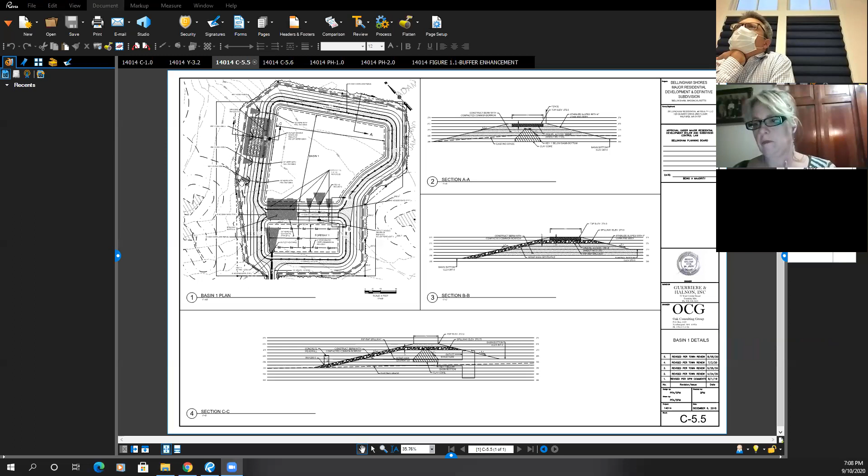Additionally, we've redesigned the outlets to the basin, so rather than one or two centralized outlets, we've dispersed the outlet flow over 4 separate outlet pipes. So it'll come out of the basin at a lower velocity and disperse more evenly into the wooded area beyond it. Also, these outlets are all outside of the buffer zone.

We have also added a clay core to the center of the berm. The purpose of this would be to eliminate potential seepage of water stored in the basin, seeping through the embankment and potentially compromising that embankment. So this would help with the long-term longevity of the basin.

We did receive a comment letter from BSC, and I believe Frank's in here, so I won't really get into that too much, but there was a comment or two with suggested conditions regarding this core, being looked at by a geotechnical engineer and spec'd by a geotechnical engineer prior to construction. And of course, we have no objection to that condition.

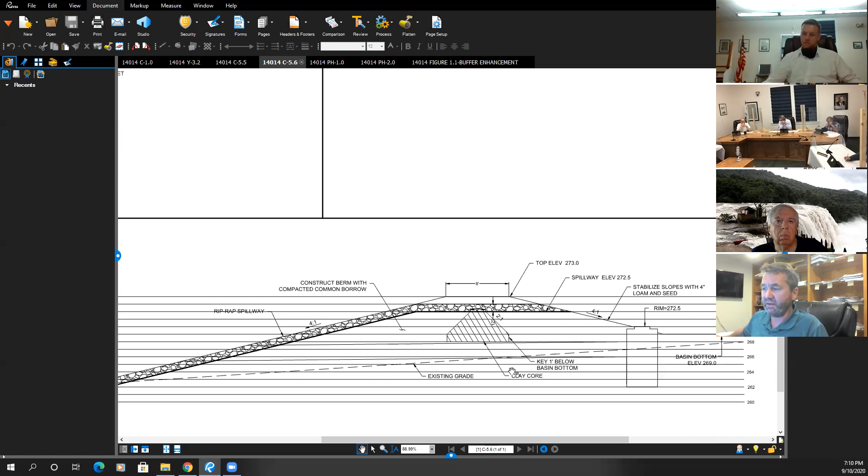Basin 2, again, we've added the clay core to the center of the berm. And I think one of the suggestions that Frank had would be to bring this core all the way to the existing grade so that you still don't have fill under here. So that would be part of that design to be submitted prior to construction.

Other than that, we're still, in each of these watersheds, reducing the rate and volume of runoff from the site. So there should be no drainage issues from the site. If you like, I can stop there, Mr. Chairman, or continue with some of the other changes that we've made.

I'd like to get Jim's input first on stormwater and then Frank's. I think this may be one of the most critical discussion points of the development, based on what you proposed in regards to the 100-foot buffer. So Jim, what is your feeling?

Yeah, so I think Sean has definitely taken a significant step to improve the basin, pulling in and reshaping that basin to get out of as much fill area as possible, as well as getting out of the jurisdictional wetland areas as possible. And then this clay core, which I'm interested in Frank's opinion on, seems to be a significant improvement. My concern always has been longevity of this basin, due to the fact that it's an extremely important structure to maintain water from getting down gradient to homes and the lake. So this is a critical structure, as you mentioned. I think Sean has definitely taken a positive approach, and I'm definitely interested in Frank's opinion as well.

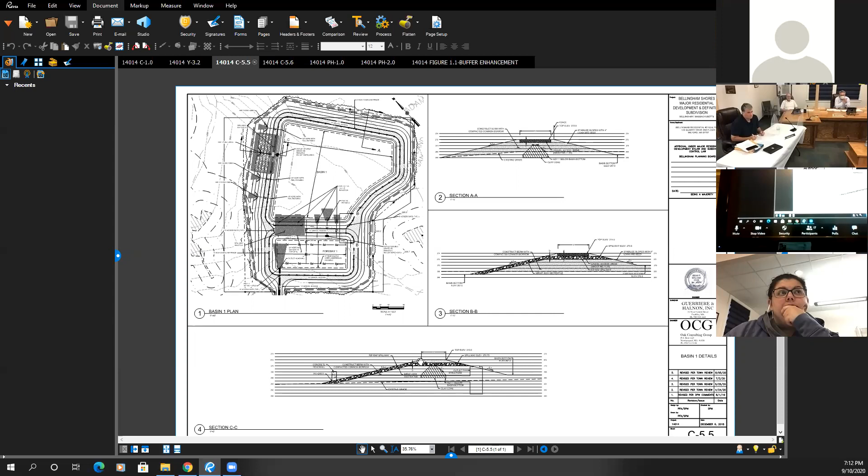Frank, what are your issues, if you have any? Sure, so again, I want to start—the previous peer review comments that we had have been addressed, and I think they've addressed them satisfactorily. In the latest set of plans, I would agree with Jim that the shift of infiltration Basin 1 out of the buffer zone maintained pretty much exactly the same hydraulic capacities and hydrology. The outflow and stuff have not been modified from what was done before, just minor adjustments. I think the modifications, the way they set up the outlet flows, are fine.

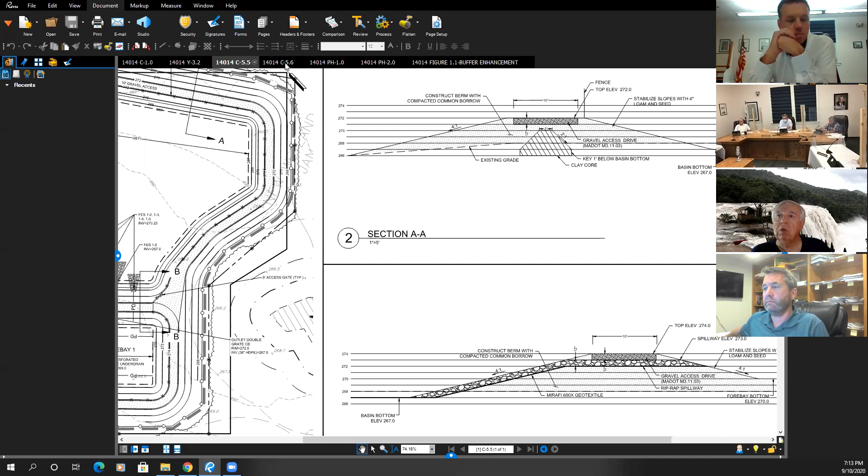My comment regarding the clay core, which I think is a very positive thing, is that it basically will stop infiltration or seepage through the wall of the berm. My concern was that it didn't go down far enough. If you look at section AA on Sean's plan, you can see the bottom of the clay core is above the existing grade.

If you go down to section C on the same plan, the concern I had there is twofold. One, the clay barrier doesn't go all the way down to the existing grade, so there may be potential for seepage along that interface. The second part is tied to the outlet pipes. When you install a drain pipe, you generally embed it in a permeable material like gravel or crushed stone, and that can act as an avenue as well. So my suggestion would be that the clay barrier extend around any drainage pipes coming out of either infiltration basin, and then extend below the existing grade.

I've seen some designs where they add a key-in at the bottom, like another inverted rectangular shape that goes into the soil below. What that does is prevent a straight surface for the water to go underneath the clay barrier — there's another small barrier, maybe a foot or two below the bottom of the main barrier. My recommendation would be that this be looked at and designed by a geotechnical person with the expertise and understanding, and that it be included in anything done prior to construction.

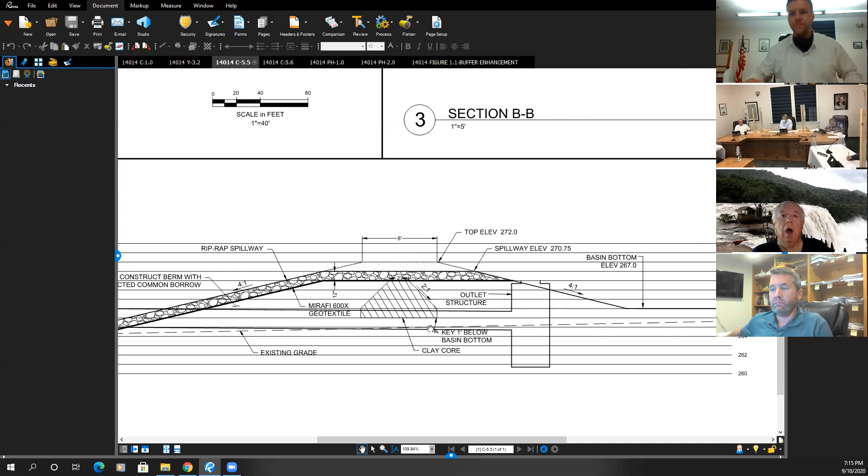Those are really my concerns about the two infiltration basins. One minor point on basin 2 — there's a scrivener's error. The outlet structure should be at elevation 270, I believe, but on one of the cross sections it shows 272.5, which happens to be the same elevation as the spillway. In design, you want the spillway slightly higher than your outlet. That's a very easily addressable issue — I think it's just a scrivener's error.

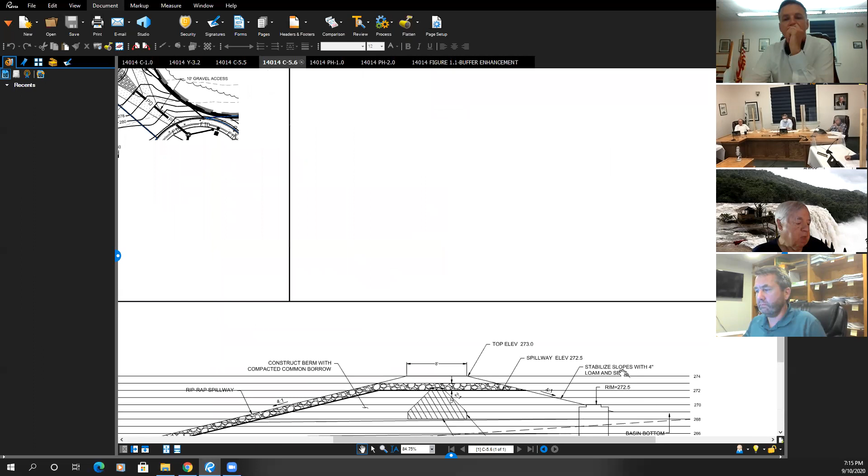The last item I wanted to note was that the Conservation Commission asked Sean and his folks to look at a groundwater mounding analysis underneath both infiltration basins. The concern is that with water sitting in the basin, you could raise the groundwater around the area. There's a standard methodology, the Hantush equation, used throughout the industry for mounding evaluations. Sean's team did that evaluation for each basin over a 36-hour period, and it shows the mounding underneath the basin pretty much extends just to the edges of the berm, not beyond 120 to 140 feet from the center of each basin. That mound is basically at existing pre-development groundwater conditions, so there's not a major raising of groundwater around the basins.

That's pretty much it for my comments. I'd be happy to answer any questions you might have.

Frank, I have one question before I open it up to the board: at the end of this discussion, will you be able to give Jim and Sean some points by next week that need to be addressed based on your concerns? Sure, I could certainly do that. I did file a letter this week, I think it was only yesterday, so it just got in the door, but I'd be happy to provide any clarification or additional points.

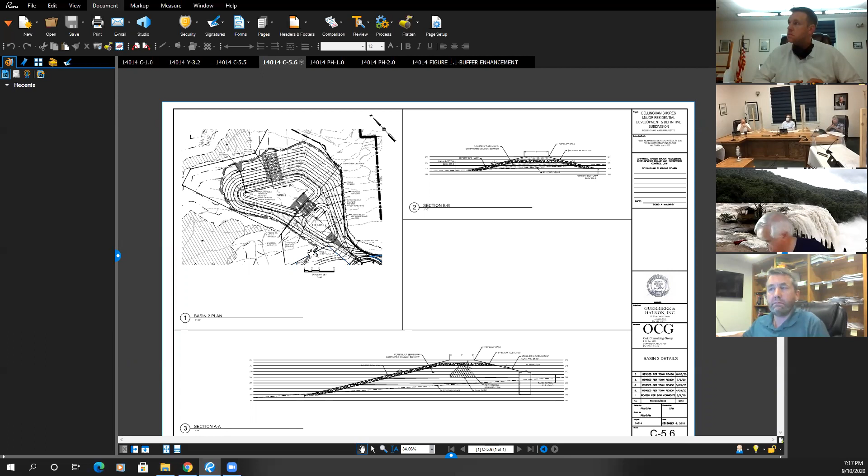Brian? I just have one quick question, Frank or Sean, or both of you. For some other projects in town, we've been experiencing rainfalls that exceed the standard amount of rain, with the frequency of those 100-year storms and a lot more volume coming from those storms, and they're coming more frequently. I'm curious if this basin is designed to conservatively weather those increased capacity storms, and what additional capacity is in this system.

I would say yes to your question. We designed these for a 100-year storm. I'm not sure if we've had storms that have exceeded that, but certainly there have been some intense storms. But I would note even for our 100-year storm event, we still have the reduction in both the rate and

the volume, so I don't anticipate any issues with storm events in the future here. If I could add a little bit to that, and correct me if I'm off on this, Sean. So under the Wetland Protection Act, they go back and use rainfall data from the 1970s or before, technical paper 40. I think your bylaw, and I'm pretty sure Sean used this. I can't remember if it was the Cornell or the other one. There was an updated version in the late 90s and another one in the mid 2000s.

I don't remember the specifics here, but for example, the 100-year storm might have been from the 1970s, 7.5 or 7.4 inches of rainfall in 24 hours. I think the Cornell is around 8.2 or 8.3 inches. And again, I'm doing this from memory. So by using the later data, you're using a higher volume of rainfall than what is required under the State Wetlands Protection Act, so there is something built in there.

Is it continuing to change? Yes, but again, I think there's some freeboard in here, and quite honestly, the drainage system conveying it doesn't handle a 100-year storm, it handles a 25-year storm. So for the near future, depending how slow or fast climate change continues to accelerate, I think the basin has been designed in a conservative manner for both basins.

I'm Brian Blake. I'm in agreement, but I don't want to get out of turn. I'll have a question for Jim in a moment.

Dennis? Yeah, my only question was how deep the clay core is going to be. And I think Frank pretty much summed that up, and I'll probably wait till Geotech comes back with his findings, because that's going to be out for the leaching purpose of it, and I didn't know if they want to line the sides of that with clay. I think that may be one of the recommendations that Frank was talking about.

Okay, perfect, thank you. Liz, I have no questions at this time.

Phil: The longevity of the clay core, is there a difference between the clay core method and a more typical method? I guess I'd throw that out to Mr. Malone. Yes, so a lot of times you'll construct a basin with just the material that's on the site.

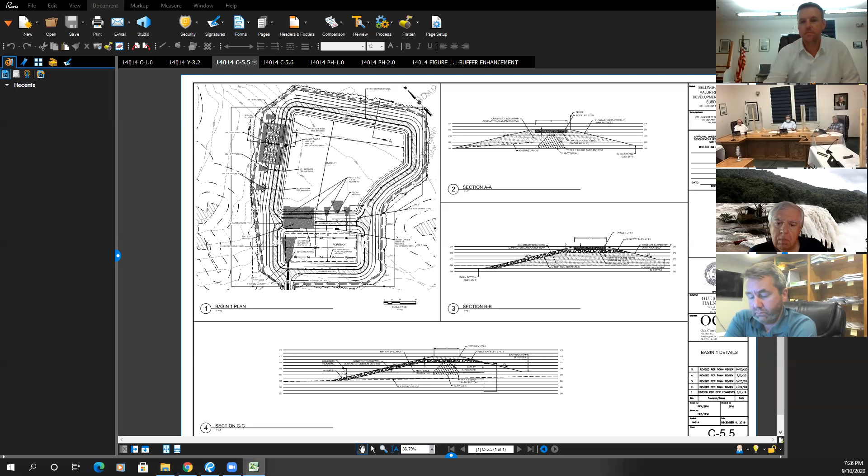Frank, I'd like to take it one step further. I would like to have that person not only look at how it's constructed, but also be available to be on site as needed during construction. We have one shot at this. And I know people had mentioned the 100-year storm. I think, Jim, since you've been on the board, how many 100-year storms have we had? Yeah, we've had a lot of storms that have breached old basins, certainly, throughout the town, various locations, we've had some concerns. So as I said earlier, we have one shot to get this right. So I think the specialist who looks at it may be on call to monitor construction. I assume they do that.

Yes, my understanding is, I've been involved with people who do that, yes, from geotechnical. And I know a question was raised earlier, I didn't mean to cut that person off.

I'm very concerned about maintenance and who's going to be responsible for it. I know in some developments, speaking from experience, there are retention ponds that have not been touched in 20 or 30 years. Jim, is there any way we can get an account set up that taxes could fund over time for maintenance? Or is that the responsibility of the town? Yeah, that's actually a standard condition the board has done for subdivisions, the stormwater annuity that would be set up, and it basically goes into, it's a one-time payment. We can work out what that maintenance cost would look like. We have a pretty standard formula at this point, and it would go into the DPW account for maintenance.

But as you guys point out, the maintenance schedule might need to be refined a little bit, so I can certainly work with Sean and the DPW director on what that would look like. I apologize, I did not get the name of the gentleman who raised the issue about maintenance, but sir, I think that hopefully will address your concern. I think that was you, Bill. Oh yes, yes it does. Thank you. Okay, any other questions regarding the maintenance, sir? We will button that up.

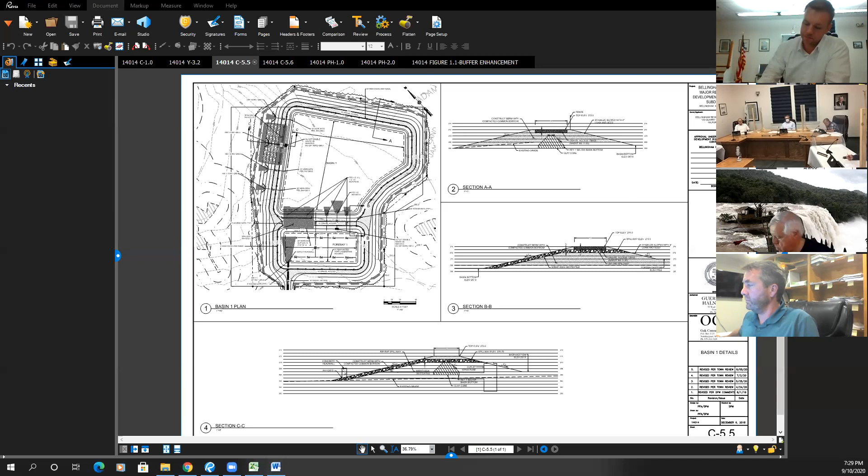Thank you. Jim, what I'd like to see done is something that Frank had raised. I'd like to see if we can use the new Cornell numbers. Yep, yeah, and for this one, given that we're permitting side by side with conservation, we do use the updated numbers because it's codified in their local regulations. Okay, so Sean, I think you may have a little bit of homework in that regard. Any other questions or concerns from anyone on the board or the audience on the stormwater management?

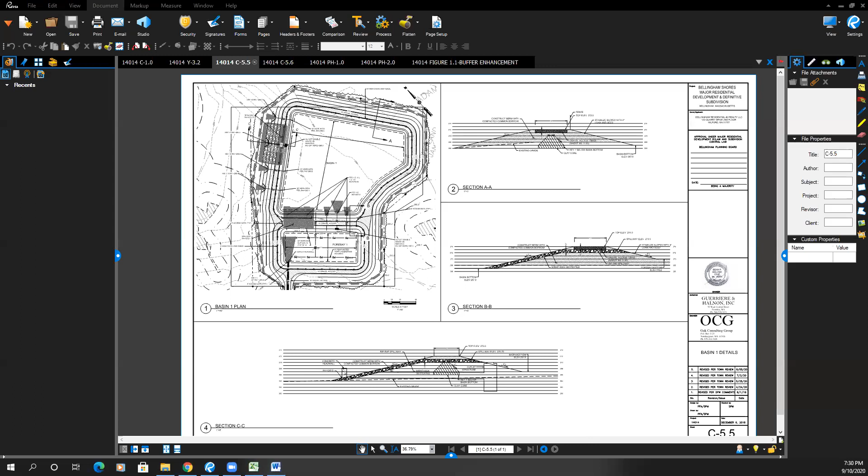Jim, can you bring the screen back? Sean, can you release the screen? Yes. Okay.

Now I think we also want to talk about, Sean, you want to mention what you've done with the 100-foot buffer? And I want to thank you for doing that. Yes, and if you like I could put the plan back. That's fine, okay.

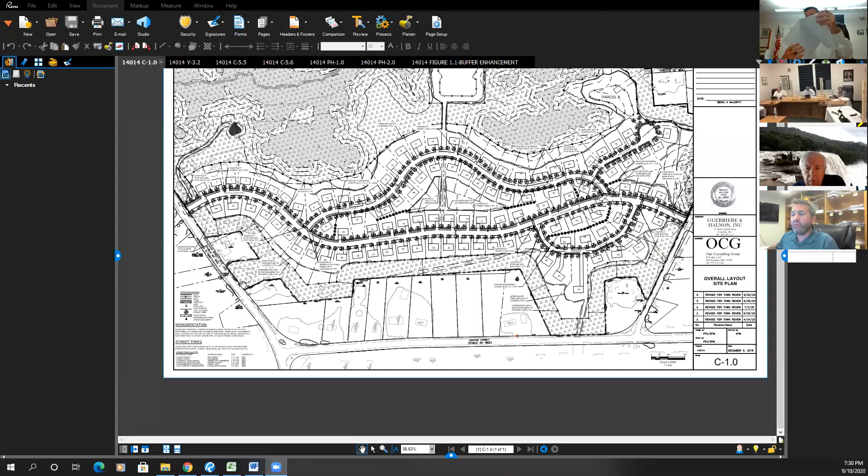So with regard to the 100-foot buffer, if everyone recalls, we were seeking to reduce the buffer to about 85 feet in a couple locations, along this stretch and along this stretch. After the last meeting and conversation with the board, we understood that was not advisable to pursue. So we've gone ahead and revised the plan to incorporate the full 100-foot buffer required by the MRD bylaw, and in order to accomplish this and still have a minimum of 30 feet for a backyard, we pushed this road to the east approximately 10 feet.

And squeeze these lots a little bit. So this road is the same, it just came out of this area here.

We also prepared this for our discussion today after talking about this with Jim a little bit, a more detailed sketch on what we were talking about for the buffer enhancement. Over in this area, this is an area that has been somewhat devoid of vegetation. You can see the existing tree line with some open areas here.

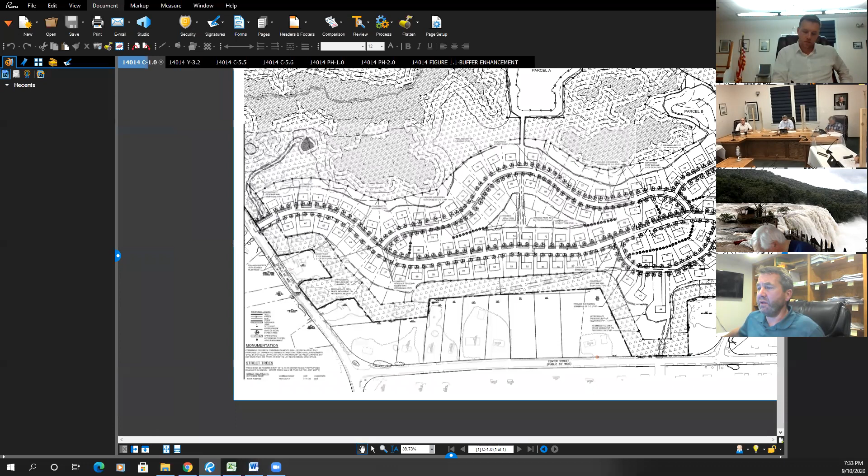So that was the changes to the buffer zone. Mr. Chair, the one other thing I wanted to mention with regard to this plan is we also heard from the board some concern about back-to-back lots and a lack of screening. So we've added some evergreen screens here and here, along this row here to make sure that there's a vegetated screen planted for those houses. Thank you very much.

Before I go to Jim, I want to ask the board if they have any comments. Brian? No, I appreciate the applicant moving the buffer and adding the screening. I think that's great. I don't have any questions.

Dennis? Now when you move the road, did you take the 10 feet from the lots that are behind that road? I'm sorry, could you say that again? When you move that road 10 feet, did you take the 10 feet from the existing lots that are there, like 80 to 95 or whatever? Out of, it was 69 to 80, these ones here. So they lost 10 feet on their lots. Correct, and these were larger lots too, on the order of 12 to 15,000 square feet, where these are a little bit smaller, closer to 9 or 10. So these had a little bit more to give.

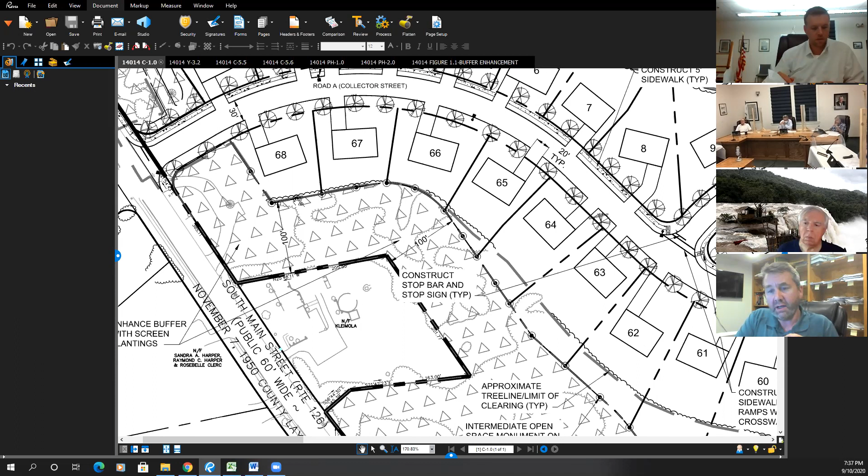What we talked about with the Conservation Commission is this would be a marker, a disc on a 3-foot high pressure treated wood post, a 4x4 post placed here to delineate this. As you can see, we have over 100 markers that'll be placed along this area to clearly identify the limit of the owner's property.

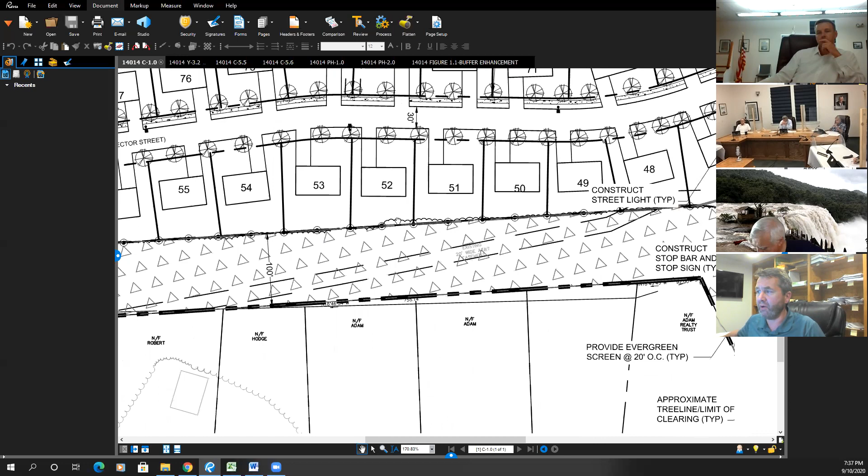And on the other lots as well, will that be identifiable? All of the other lots' interior marks would have typical lot corner monumentation, typically required of any subdivision. Those will be in the ground, correct? Yes. Okay, in regards to the area where you've taken the space from and where you plan to plant trees...

You're going to keep as much vegetation there as possible? Yes. Which area, Mr. Chair? All behind the lots that you shifted up by 9 to 10 feet, where you have all the markers. Yes. You're going to leave as much vegetation between the other development, the other homes in this development, correct? Oh yes, absolutely. Anything within that 100 feet cannot be touched.

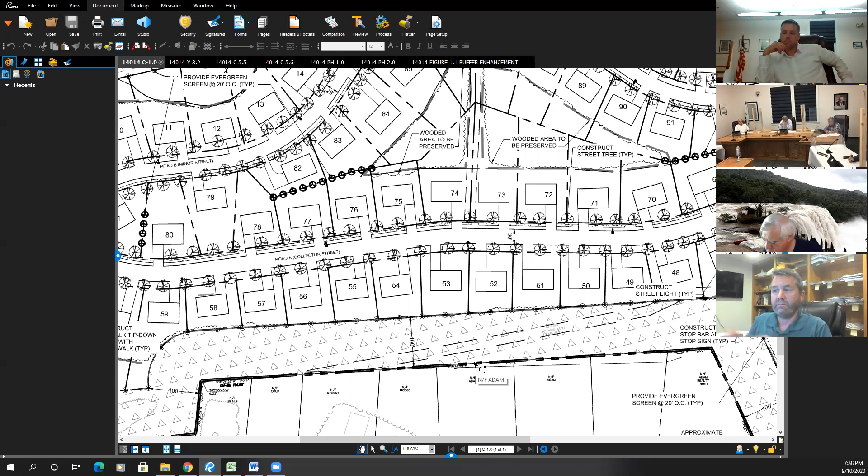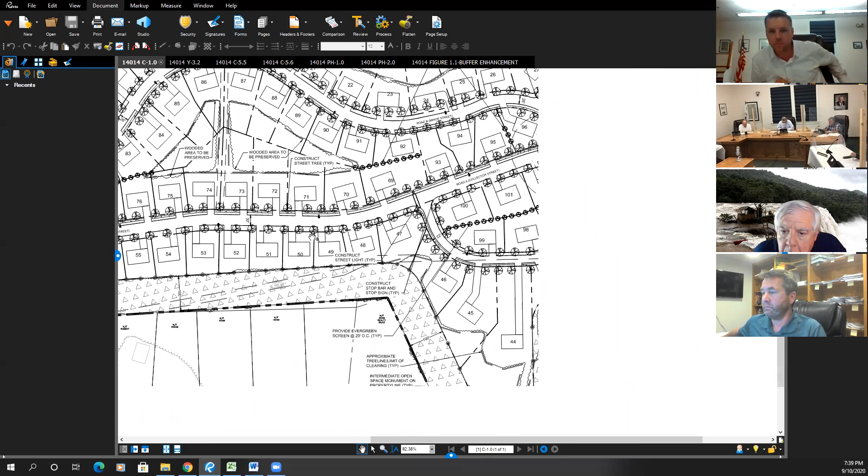Jim, you have any concerns? Just a few comments, one touches on what you just mentioned. Sean, I see when you were pulling in the lines, you may have missed where the limit of clearing lines are. I'm looking behind lots 42, 43, and along 44. Yeah, more to, there you go. To pull it in would be good, because wherever that 100-foot line is, you don't want any clearing beyond that. And in some places you're actually pulling it even further, so that's great.

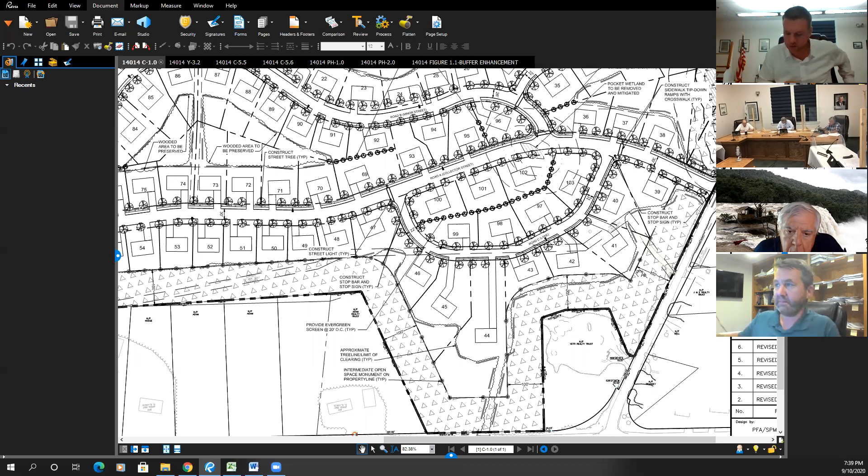And then the other thing was the enhanced buffer screening exhibit. If you are getting to a point where you have exact locations, it would be good to include a schedule, the tree caliper, type caliper, that sort of thing. Okay.

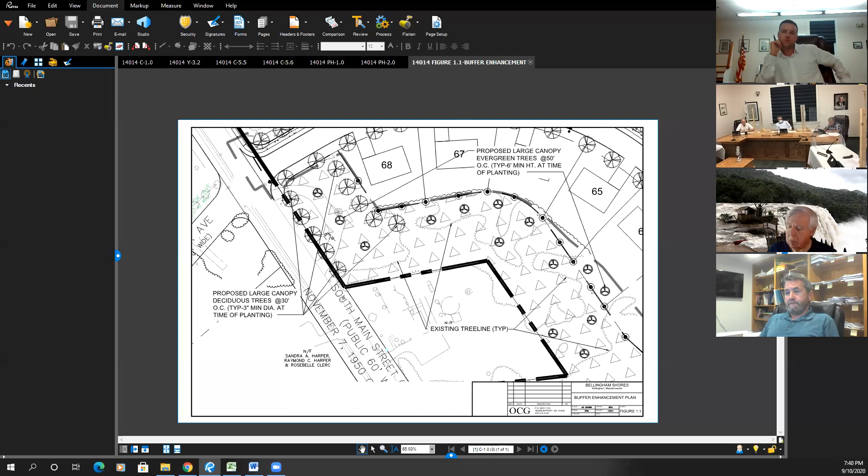And I understand right now, Jim, everything we're looking at is conceptual, correct? We've not seen plans for homes. Well, you do have plans for a home, you do have types—I believe it's 4 types that they have proposed. They're going to vary the houses so it doesn't look similar, correct? Right, that's the intention the board has stated so far, and we can illustrate that in the conditions that we want them varied.

However many lots, it has to be an equal percentage of the 4 or something of that nature. We can certainly talk about that or refine a condition to meet that. I want this to have some country flavor to it.

Any other questions from the audience on the 100-foot buffer? I don't see any, okay. Jim, I'd like to move on. Sean, we get the stream back for a moment.

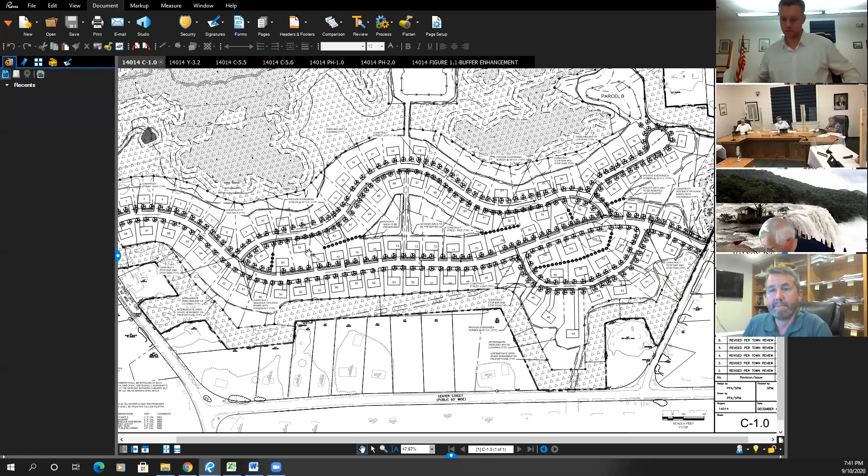We're going to talk about the triangle space, which is considered open. I know we requested a restoration plan. I think we need to beat this up a little bit. Jim, can you clarify what you've learned since the last meeting about the open space plan and the triangle?

Yeah, sure, and I think Sean does have another exhibit if you want to pull it up. So in that open space plan, there's a couple things I did address with Sean—some initial concerns, big picture concerns we're all already aware of, and really why the restoration plan was requested. This triangle is an area that used to be forested at one time, and now it's kind of the remnants of a construction site. There's a sewer line running through it, and riprap swales associated with a drainage basin from another project.

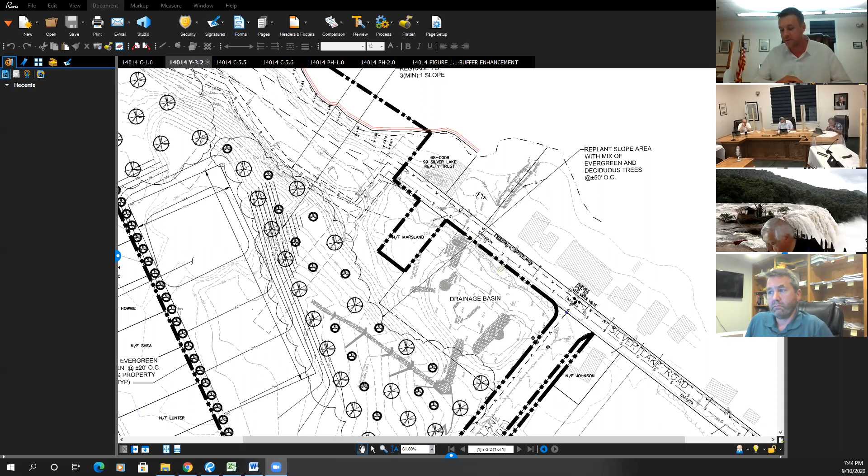Aside from that, I think the open space is a really interesting concept. I asked DPW to cost out what this might look like in terms of dollars, because I really like this concept, but I think this might be an opportunity to look to the neighborhood and ask the residents what they want, what could be an opportunity for them. So perhaps it's a payment in lieu, and we look at a kind of master plan for that open space. But that's just my initial thoughts.

Again, I commend Sean for looking at this. My other comment would be, again, like the last one, I know you addressed the big picture of evergreen and deciduous, but if there was a recommended type and caliper, that could certainly help get a better understanding of it.

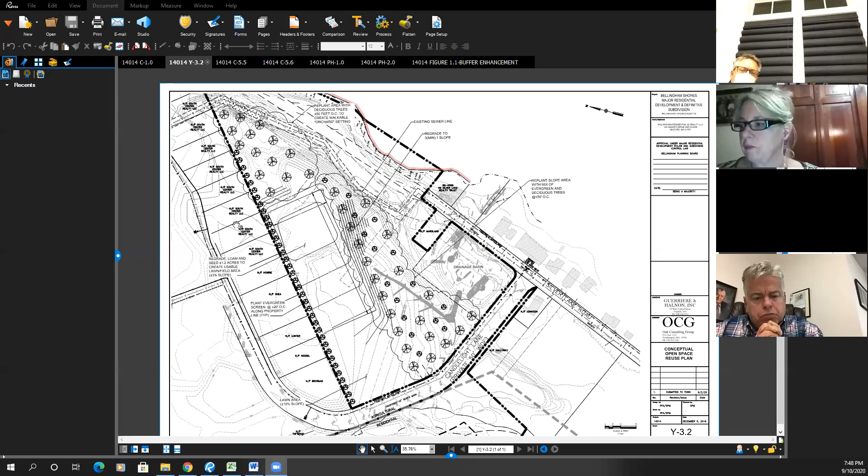On that, you're going to regrade the 3-to-1 slope. What's the grade now? In some areas it seems to be as steep as 2-to-1, so the idea was to try to smooth it out since it's a little haphazard, just clean it up. This area has a plateau that then slopes steeply, so the idea was to pull these grades down to flatten it. We had about a 3% slope here, just to make a more usable lawn. That was our thought on this.

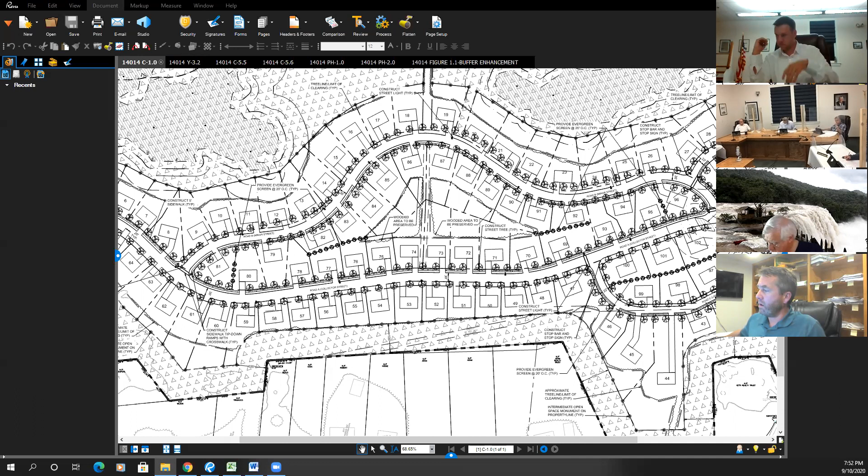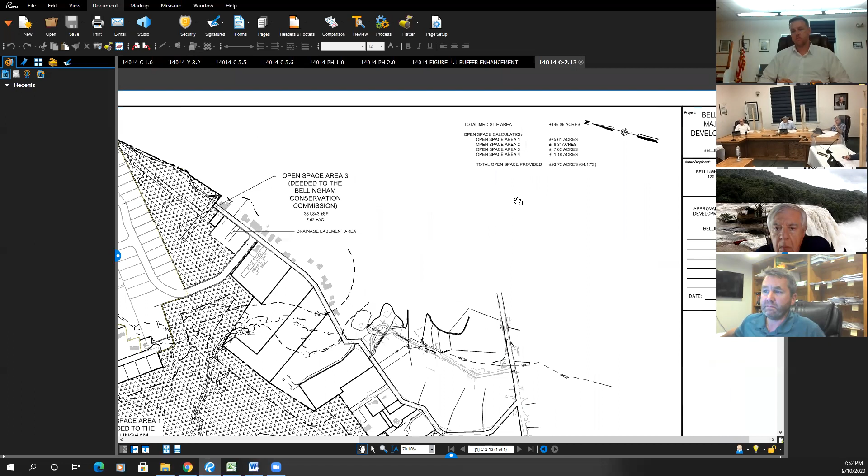I don't know if we've talked about open space, maybe this isn't the right place, but at one point I'd ask for an old-fashioned spreadsheet of your open space calculations on the whole development. That goes back prior to Sean maybe even being involved, but I'd asked for that before, and as we move forward I'd like to see that put back on the table. We do have on our overall open space plan this chart listing each open space area and its actual area, corresponding to open space 3, 1, 4, and 2 down here, so that's broken out on the plans. Sean, could you color code that for a future meeting? Sure, color code each of the different open space areas. Or open space in general, whatever Jim thinks is more appropriate, just so we get a better visual. We can do that, but just with this plan, all of this area with the triangle hatch is open space, and the white areas without hatch are the only development.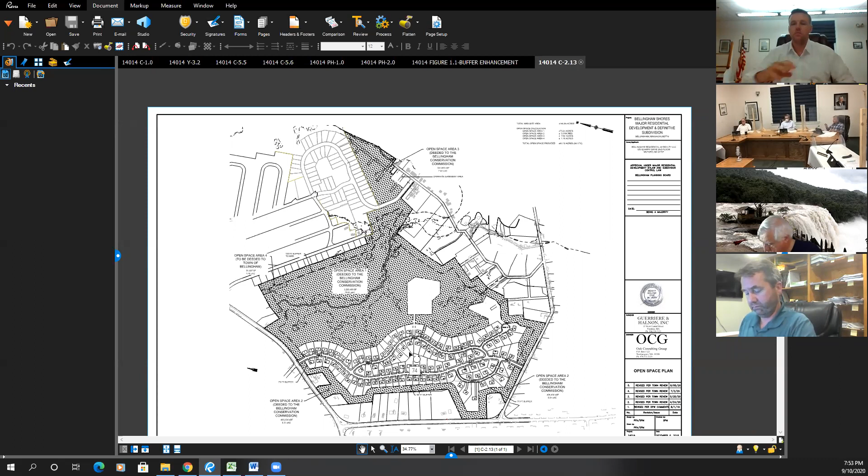In regards to my comments about open space, I'd like to get as much use as possible on that triangle. Jim, is any of that considered in the lake at all? Yeah, Sean, I know this was brought up at conservation.

Not only is there a sewer line running through the open space drainage swales, but it's also underwater in some areas. I know you only had about 12 hours since the last meeting, so you probably haven't done any due diligence on the ownership or the parcel line there.

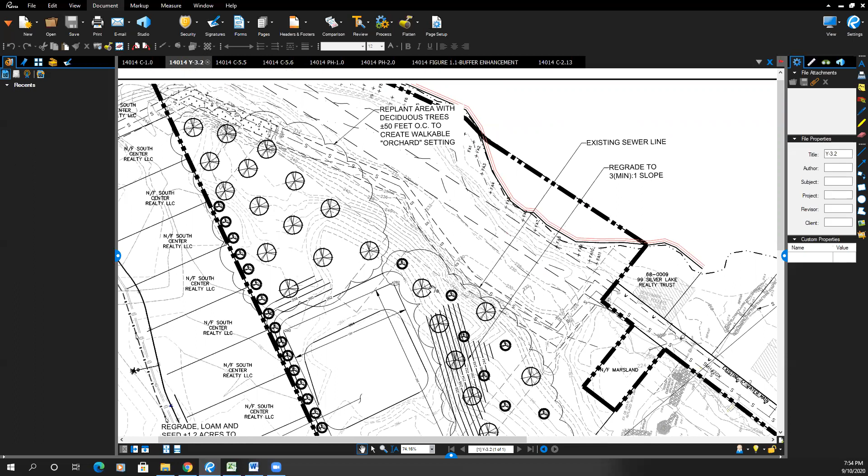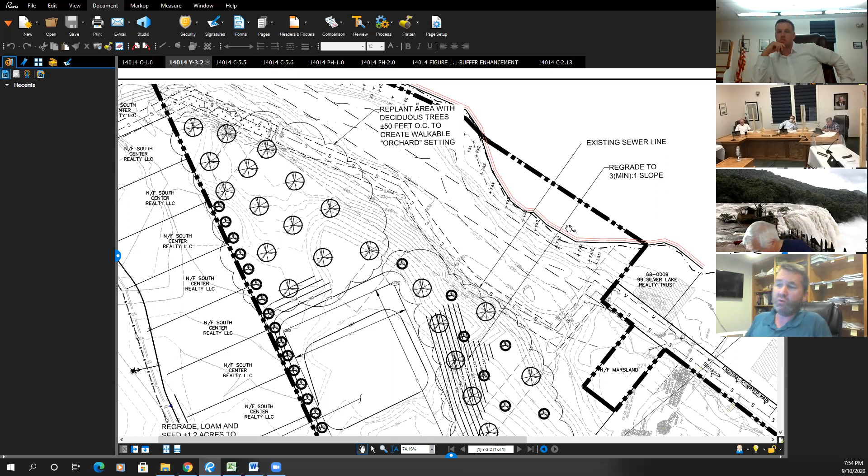Right, so what I need to do is get together with our surveyors to understand what this property line is based on and what this bank of the lake is based on. The chair of the Conservation Commission, who started this conversation, understood that any land underwater associated with the lake was actually the town's property. So this area would contradict that assumption. We have to do a little homework on our end to confirm that.

We'll ask the professional land surveyor to either certify that these are in fact the correct lines, or correct the lines and recalculate the numbers. But any change like that, as well as adding additional drainage area or drainage easements, won't change our overall meeting of the open space requirements. The 60% will still be far above that.

Sean, does the easement count as open space as well? No. In our calculations right now, this whole box right here is not counted in any of the open space.

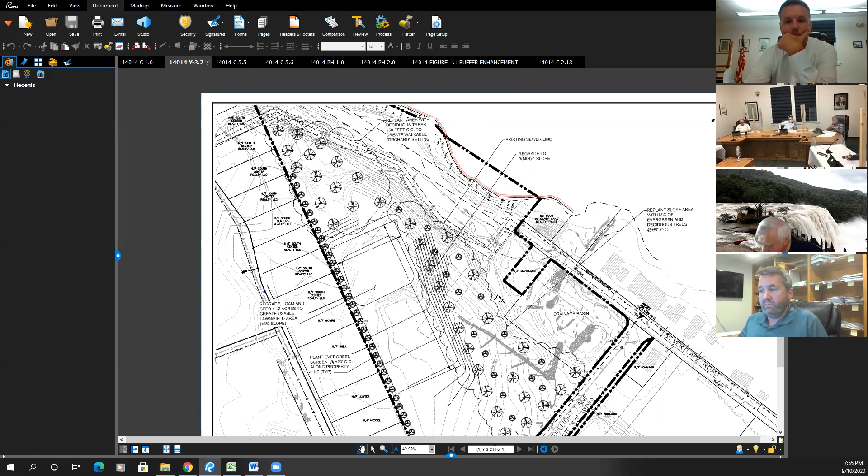Before I open up to the public, I've asked some unique questions in my time on the board. I have another, probably the strangest one I've ever asked. I thought I had heard at one point that Fairford bought part of the lake, or is that just a bad rumor?

That would be news to me. I don't know, I don't think so. Jim, had you heard that before? Yeah, I've definitely heard discussions about that, but I've never confirmed it. Yeah, I've just heard those rumors for a while now.

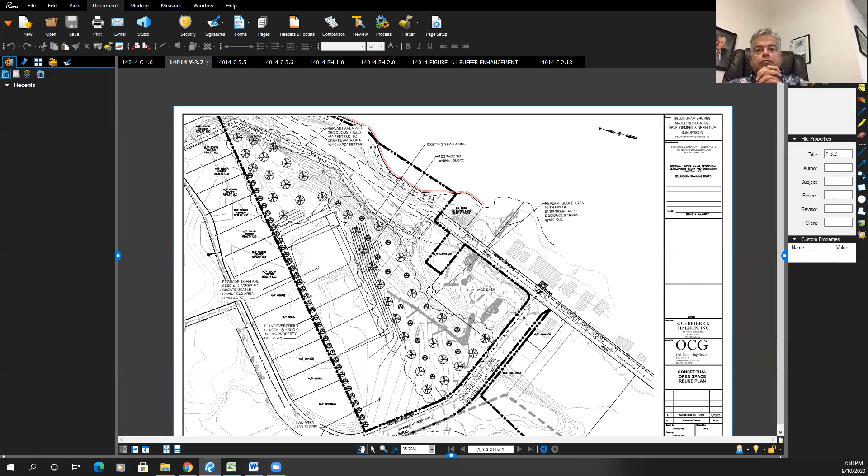Just to follow up on what Jim was referring to with regard to that lot 10 on the lake that is used for drainage and controlled by the applicant, it'd be a great acquisition for open space. As you may know, there was a canoe launch on Silver Lake Road that went away with a drainage swale for the first project, and a lot of neighbors were disappointed that they could no longer launch their canoes or boats from there. You'd actually have to go over to the lake, which is sometimes closed, and people like to go fishing and launch their boats there. So if there's any way we could acquire that small parcel—it does have a drainage swale on it, but I think there's certainly enough area to put a canoe or boat launch there. It would go a long way towards making people happy along Silver Lake Road. We just wouldn't be able to allow parking; you'd drop your canoe off and have someone take your vehicle away. But it certainly is a loss, or was a loss, when the first project came in and the boat launch area went away. Thank you.

Dennis, I'm in total agreement, I think that'd be a great get for the town. It would certainly be some very usable open space, and it's only probably 5,000 square feet.

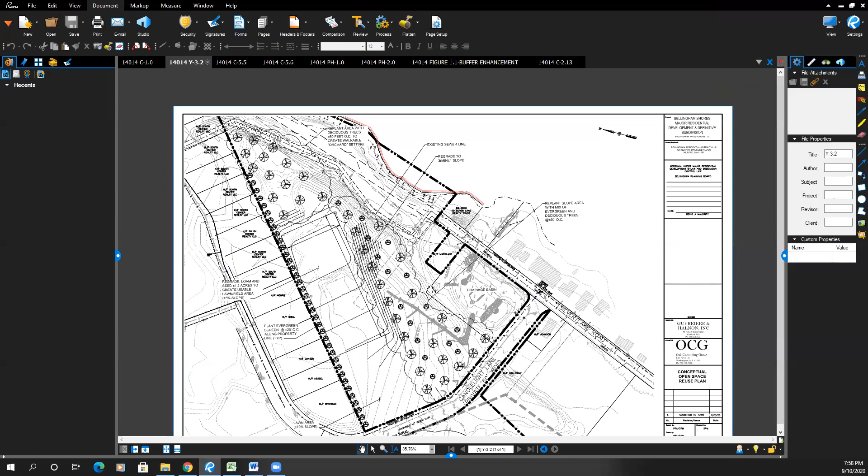Thank you, thank you. Any comments from the public? If anybody has comments, you're welcome to unmute or raise your hand. My name is Carrie Clamola, I just had a quick question—sorry I didn't bring it up—regarding the buffer. That 100-foot buffer, will all the trees be taken down?

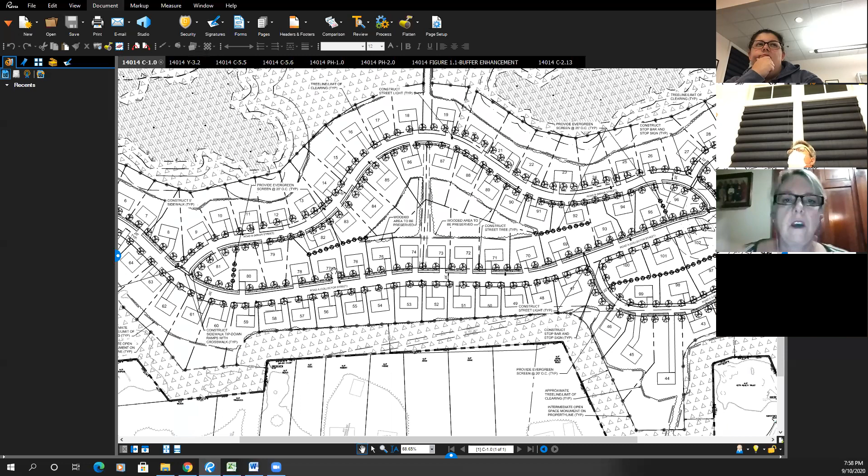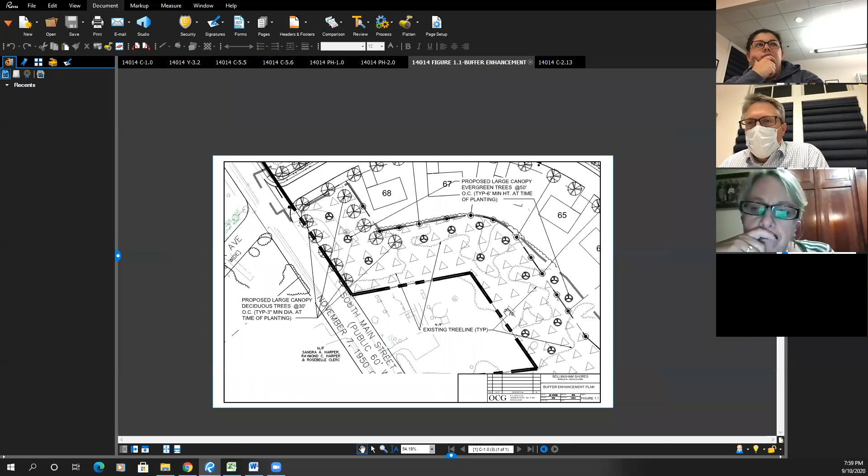We're concerned because right now I'm on lot 950—you know where my property is, probably because I was at the last meeting. So will all the trees along our property be taken down, and are those few trees you've pointed out the ones that will be planted? My understanding was none of the trees between those two black lines are being taken down.

Is that correct? Yes, and let me confirm that again—any existing trees within this 100-foot buffer will remain as they are. What we're proposing in this area, because some of it is sparse and has been previously disturbed, is to revegetate areas that currently don't have trees.

There are a lot of trees in the back, right where you are. We were concerned that if you took all those trees down, we'd be waving to the neighbors. Our intention is not to take any more trees down. That would be great, thank you.

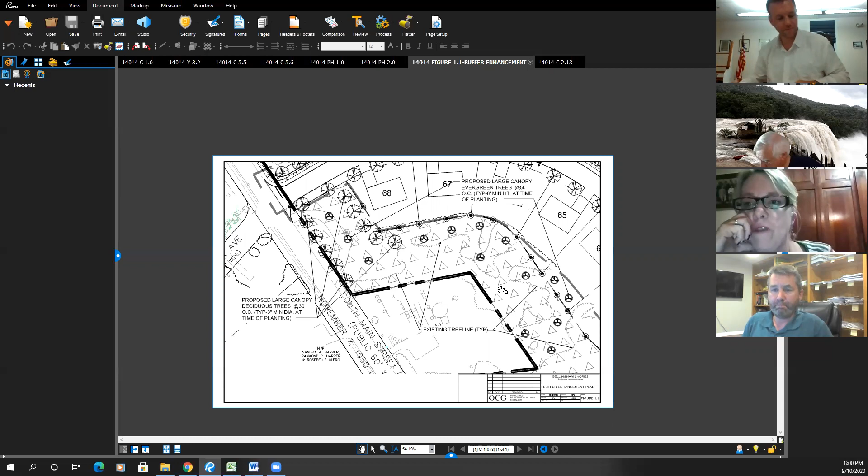Yeah, that's our goal. I think what Sean can do to facilitate is mark that off prior to construction. That would be great, thank you. So I think that should address your concerns. Sean, is that reasonable? Yes, absolutely.

I would think they would only have to mark off the back portion and, to some degree, the portion furthest away from the 100-foot. But along those property lines where you and your neighbors are, that will be marked off, and I feel pretty confident they will not disturb those trees.

Now, there could be some exceptions - there could be some trees that are dying. As they go through, they may look at that. I can't guarantee it, but there could be some instances, under proper management, and that's understandable.

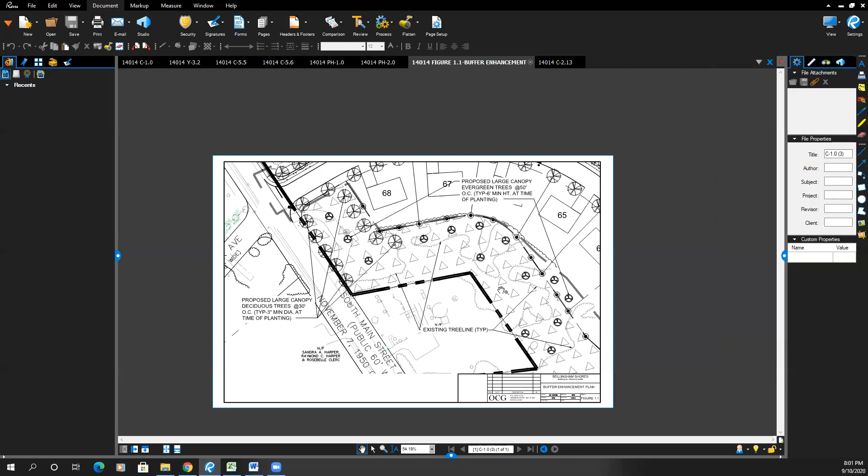Any other questions on anything we discussed? I'd like to have the screen go back. I'd like to talk about the phasing plan. I think that's going to be a key point of discussion tonight.

Jim, where do we stand right now with phasing? First, just tell me where we stand, and then we can nail down some definitions. Sure, so Sean, I did notice you sent an updated phasing plan. Last time we talked, the board had looked into some slightly more defined or refined phases. I think we might have been up to 6 at that point.

We also discussed almost a 2-track phase, one being infrastructure, knowing you need to put some binder down on the roads, get water, sewer, etc. down at a larger swath. However, a parallel track of maybe a percentage of houses before you can move on to another phase. Sean and I had some conversation about what that language would look like, and I don't know if you had a chance to look at it, but some updated thoughts on that?

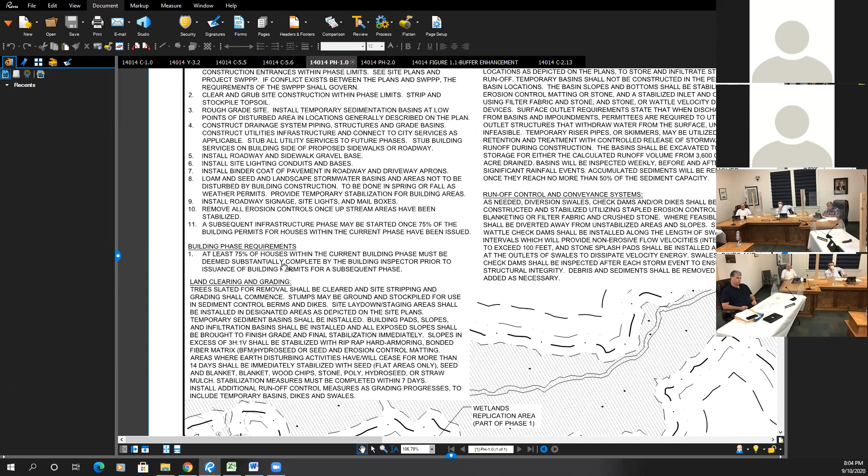I've added a note here indicating, on the overall infrastructure phase, that 75% of the phase 1 infrastructure houses must at least have building permits and be under construction. But probably more importantly, for each of the building phases - again, these 4 phases of about 15 buildings - 75% of those would have to be deemed substantially complete by the building inspector prior to beginning the next building phase.

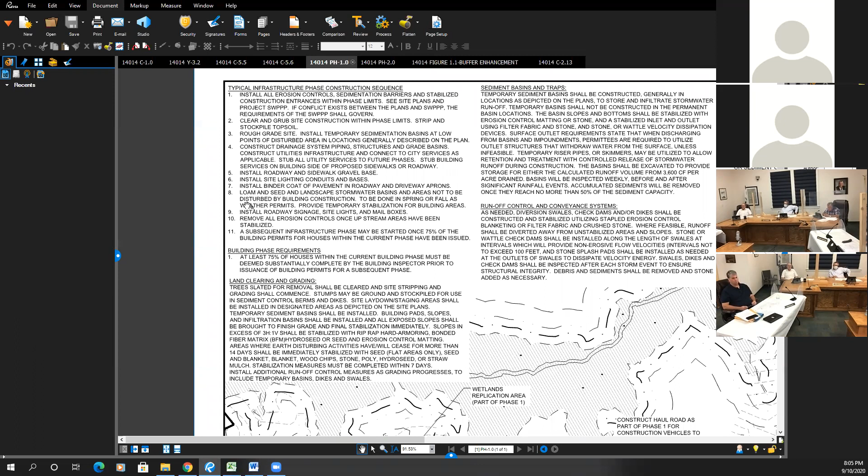So that's phase 1, and then phase 2 is now a separate sheet to clearly define the two. It would be then 3 phases of approximately 15 houses. I think one of these might have 16, with the same type of restrictions.

At this point, while this is under construction, this would all be done - this access would be fully functional, and cars could use this. In this phase I kind of flip things around a little bit. We would start here, then go to here, then here, with the idea of people not having to drive through construction - you could exit out this way while this final area is being developed.

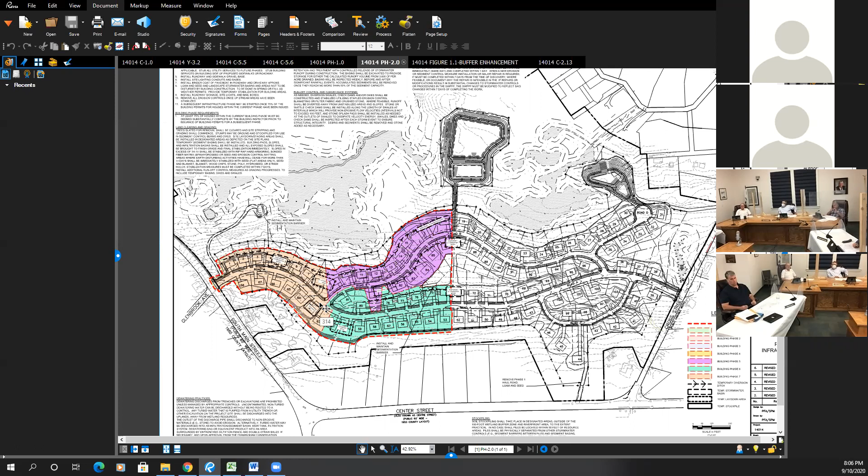But the roadway would be constructed at least to binder, probably before any occupancy permits could be granted. So that would be the primary function of this infrastructure phase - all the infrastructure is done, and then the house building starts.

Anything else you want to add?

I think just the same things we've talked about before are still incorporated into this plan. The access off of Center Street for construction versus Cross Street would still be maintained. We'd still have a haul road here to bring the stockpile into this first infrastructure phase to be used as fill. All of the stormwater basins would be constructed and complete as part of the phase one infrastructure.

Yeah, and we also have the erosion controls during construction along the haul road, as well as some detailed notes. These are basically from a SWPPP that would be required for this site regardless, so just reiterating some of that stuff right on the plan: temporary seeding, stabilization, maintenance requirements. We have the temporary sedimentation basins, which again would have the maintenance requirements associated with this.

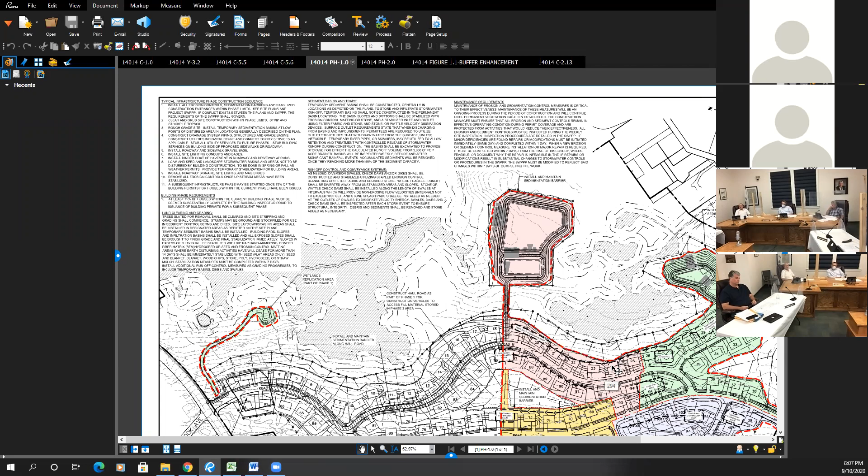So yeah, I think that this phasing would go a long way to meet some of the concerns we've heard from the board.

And with that, I'd like to go to the board. I'd like to switch up a little bit. Dennis, you added a lot of strong points at our last meeting in regards to phasing. Can you talk about what your concerns are, Dennis?

Yeah, I didn't quite hear his opening remarks there on the phasing - they're gonna be permitted lots before he does. So I think Sean's breaking it up now, and before the next meeting we can have an opportunity to really read those details, because we haven't actually received this yet. But yeah, a certain percentage of houses would need to be completed or substantially completed before going to the next phase. And then overall, across those four phases, essentially the intent is a certain amount of houses need to be complete before he can go to the left side, phase two of the infrastructure, essentially.

So he was not building anything on spec. Right, yeah, well, no, yeah.

Brian? A couple questions. When the construction for the infrastructure goes in, does that require clear cutting the entire site for the homes and the infrastructure of the road, or is it just what needs to be done with the infrastructure?

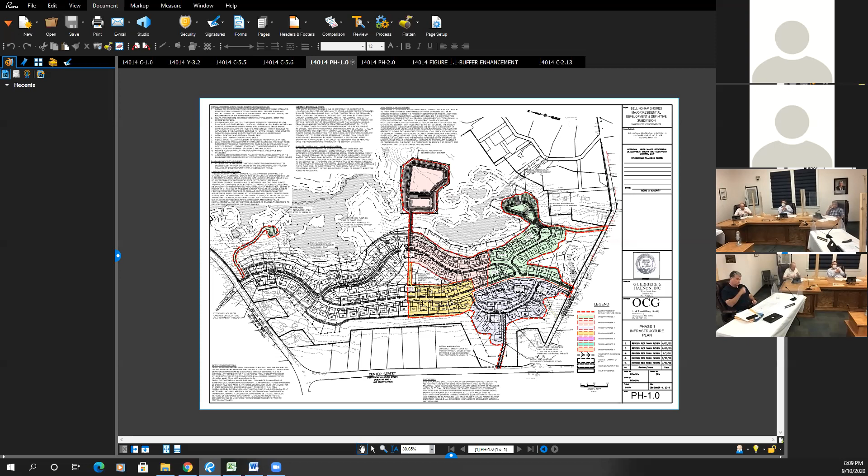Yes, with this, it would probably be the whole area. I think we probably could structure it in a manner that the house lots not be cleared until that phase begins - I think that would make sense. So when the phase two houses are getting ready to go, or when phase one reaches a certain point, then you can go and clear those house lots. Something like that, I think, could be reasonable.

Okay, yeah, I mean, just if we can, if that's possible. And then - what was my second thought?

Jim, with regard to some other projects in town where we've had some interpretation differences with the developer in terms of substantially complete and essential infrastructure and all of that stuff - is there a way to quantify that and to get some sort of approval at each level?

Oh yeah, certainly, we can define those in our conditions. Once you guys are to that point, we can certainly start putting something down on paper for you guys to look at and see what formula works. Substantial completion could mean a certain number of occupancy permits have been requested, or maybe everything short of an occupancy has been completed, something to that effect. We could put it right in the conditions there, so there's no ambiguity as to what essential infrastructure or anything like that is.

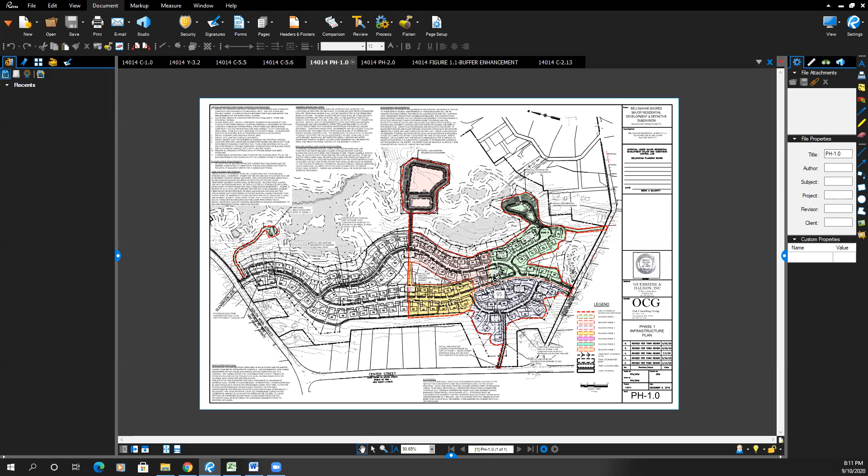Phil? No additional comments. I'd like to just pick up on what some other people have said - I don't feel comfortable with building permits. As we define what phasing will be, I think it should be a percentage of occupancy permits. I know people have mentioned other developments in town.

Obviously it can't be turnkey, but I'd like to see it phased in such a manner that when you move from one phase to another, it's almost a move-in condition, so people can move in before you move on to another phase. So I'd rather see a percentage based on occupancy as opposed to building permits.

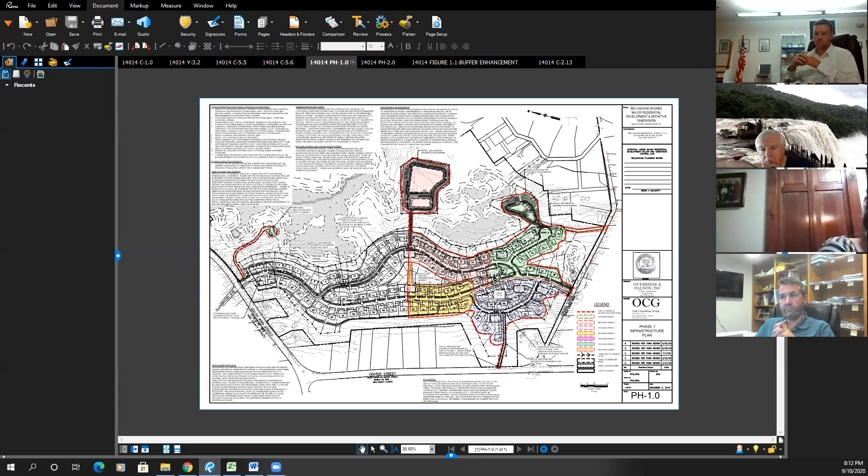I know we've spent a lot of time tonight talking about the triangle at the top of this development in open space and the issues that arose based on how this piece of property was treated. I want to avoid that at all costs moving forward, because this is going to be where people are going to live in their community, and I want it as seamless as possible.

I'm sorry, Russ, I didn't call on you, excuse me. Oh, that's fine, Bill, I have no further questions. Thanks, I apologize, I didn't see it on the screen until just now.

Bill, can I ask one question? In to our discussion. I just have one question, if you don't mind.

The other consideration, and it might be in the notes to the plan that you just showed, is as we move from phase to phase, that there's adequate screening in the neighborhood and between the phases, so that to the best of their ability, we're not creating eyesores along the way.

The one positive of this is you've got a 100-foot buffer around the whole property, so that's somewhat of a positive. But certainly, we've talked to Sean about a draft SWPPP that shows things like dust fencing and other screening measures. I know you've provided some of that already. We can look at that to see if there's ability to beef it up to make sure there's screening.